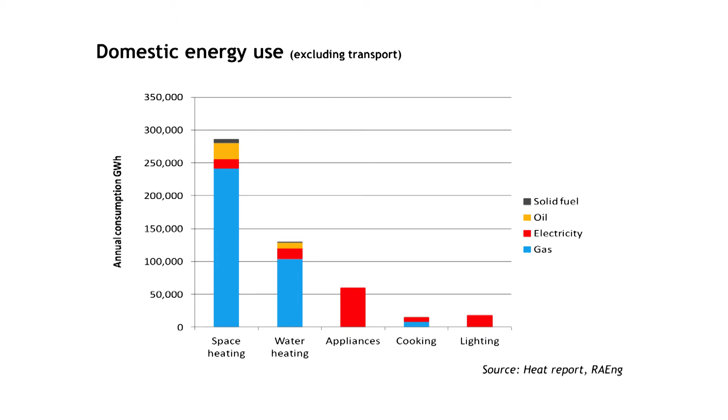When you start looking at home energy use or domestic energy use, you can see from this graph that the big issue is again gas heating. This blue bit here, bright blue on my screen, rather dirty blue on yours, that's gas being used for space heating, and that's gas being used for water heating. Unless we can find a way of dealing with that, then we're not actually going to manage to reduce emissions.

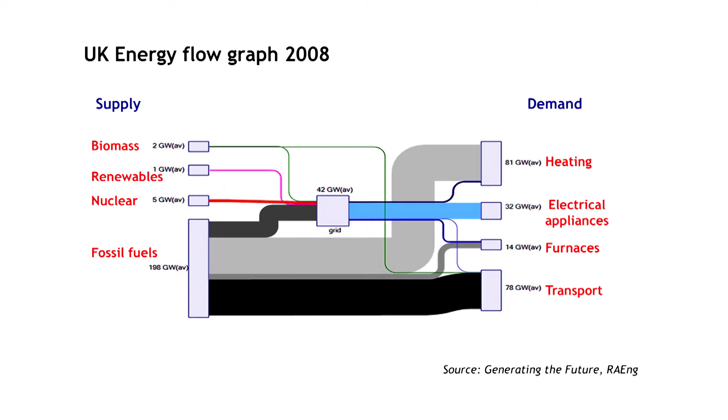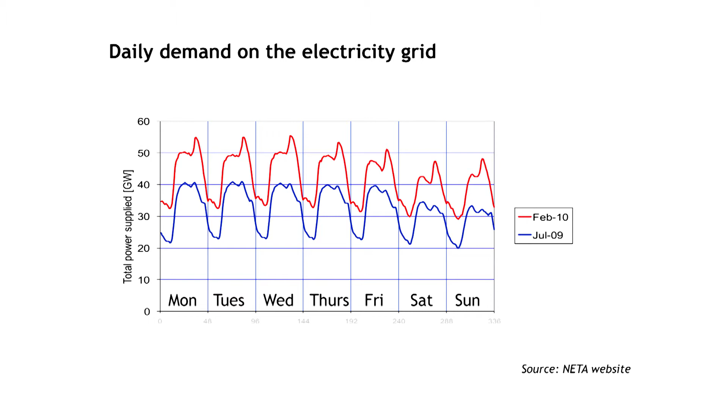The top line is February 2010, when it happened to be quite cold, and the one below it is July 2009, when it was actually quite hot. You can see that the total power supplied on the electricity grid varies between about 20 gigawatts, which is the minimum we have during the summer night, and about 55 gigawatts, the maximum during winter, particularly at about 6 o'clock in the evening. This is quite a challenge for grid supplies, that we're looking at more than a 2-to-1 ratio in demand.

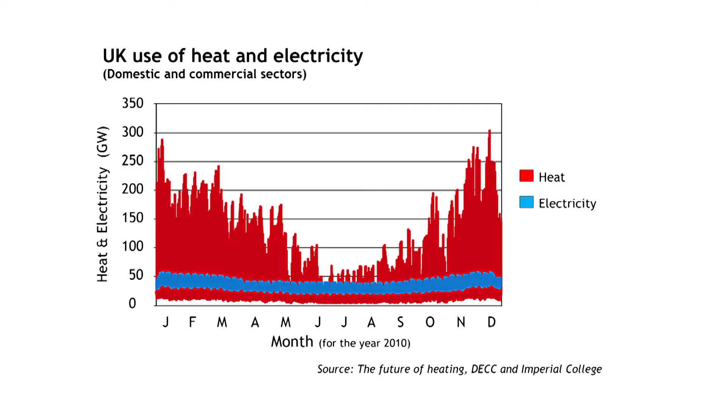But we've now got heat on the same graph, and you can see that goes up to somewhere around 300 gigawatts instantaneous demand in winter. This is where we have a really serious issue, that it's not just a question of saying how do we get so many kilowatt hours or megawatt hours throughout the year, it's how do we deal with these short-term peaks in power and peaks in demand?

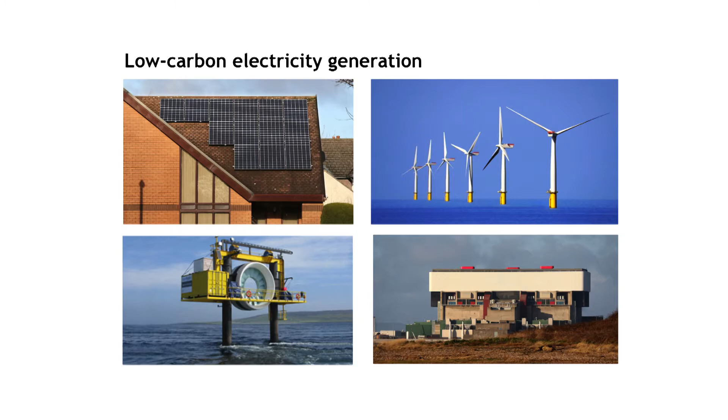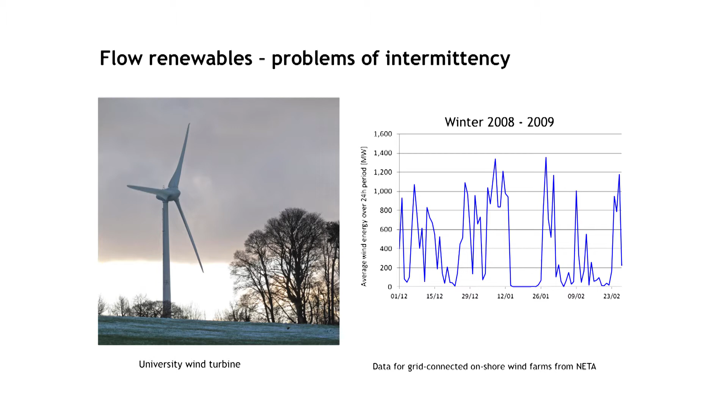But they all have issues. A lot of the flow renewables, this is wind, tides, tidal currents, and sun, are not there all the time. The graph on your right shows the output from wind turbines over winter of 2008 and 2009, and you can see that for a fortnight we didn't have any appreciable wind. We looked at this as part of a study done in the academy, and for a lot of the really serious periods of lack of wind, it's an anticyclone over pretty well the whole of Northern Europe. So saying, okay, we'll just connect into Scandinavia or something doesn't actually help, and that's a fairly serious problem.

One can live perhaps with a few hours of missing electricity energy. To go for two weeks without electricity is actually very difficult. So how does one actually match the various sources that we're talking about with what we actually need and with the demands we have?

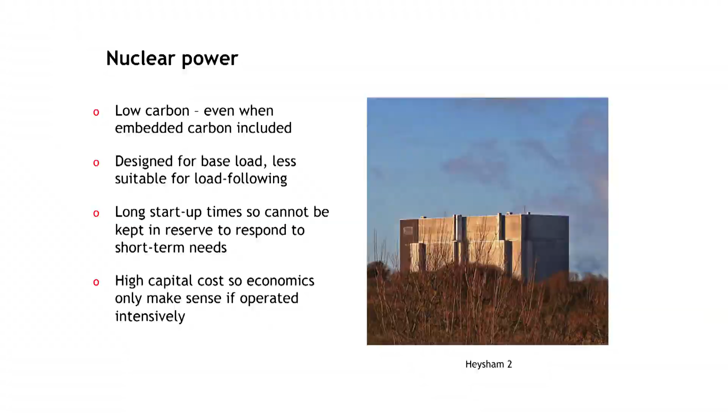Nuclear power is more consistent, but nuclear power is actually very good if you switch it on and want to leave it on. Nuclear power is pretty poor at following the sort of sudden demand increase that we get in Britain at about 7:30 in the morning, when everybody wakes up, puts on their heating, puts on their kettles, sets off their gas boilers, has showers, and all that sort of thing. So it's great as a steady load. It doesn't make much sense as load following, and it certainly doesn't make much sense as peak lopping, where you just want it for a few hours in winter, because nuclear power is expensive, and to build expensive power stations that you're not going to use for most of the year doesn't sound a very good investment.

There's been quite a lot of talk over the last decade about biofuels. I think the general consensus now is yes, they're great, but we don't frankly have enough land to make an appreciable difference. One can perhaps say, yes, we can get to 10% biofuel in our liquid road transport fuel. We could perhaps use biofuel just for aviation if we didn't use it for anything else. But the idea that it would actually replace gas, coal, oil in our mainstream heating, generating and transport uses is really most unlikely.

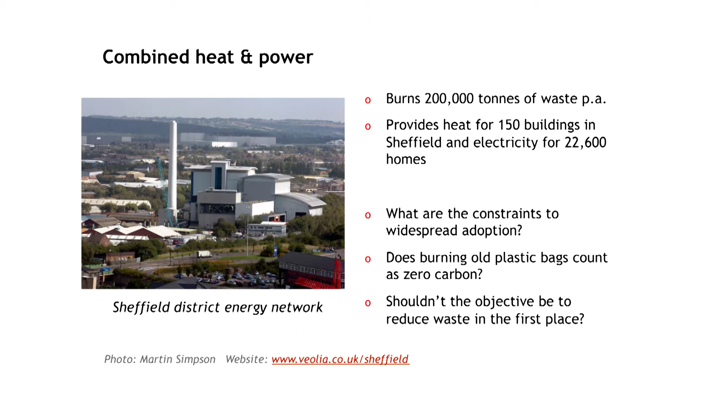There are various other options you can think about. If you go to Sheffield, you'll find this district energy network, a brilliant network with pipes under the city centre. It burns 200,000 tonnes of waste per annum, which means you don't have to have landfill sites. It provides heat for 150 big buildings, some of them quite large university buildings, hospitals, city offices and so on, and provides electricity equivalent to about 22,000 homes.

But what are the constraints? Why don't we all do it? Well, one of the first problems is that you want somewhere that's relatively compact. It works quite well in Sheffield, where there are a lot of buildings fairly near the centre. It would work rather less well in spread out places like, I don't know, Prestbury or Wilmslow, where houses are further apart.

In all the successful cases throughout Europe, district heating has relied on the local authority having the enthusiasm and the incentive to actually make things happen. At the moment, most local authorities, particularly in the compact cities, are saying they're on the verge of bankruptcy. If they have difficulty meeting their legal obligations, how many of them are going to consider that building combined heat and power is actually a priority?

It also works best when you don't have competition. If you're going to say, well, we insist on having competition, then that's rather difficult. Also, I think you have to ask a fairly fundamental question. Does it make sense to burn second-hand plastic bags and say this is zero carbon? After all, plastic comes from oil. Shouldn't you really be campaigning to say we don't want the plastic bags in the first place, we will take our reusable raffia bag to go and buy our potatoes, rather than getting packaging and then burning it? So I think there are some fairly fundamental questions about what counts as zero carbon in this particular environment.

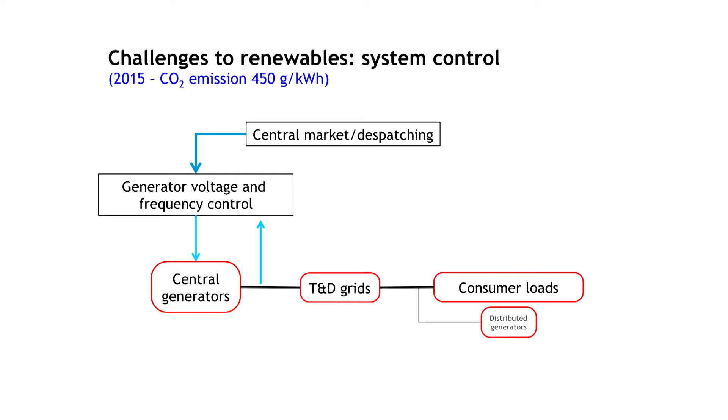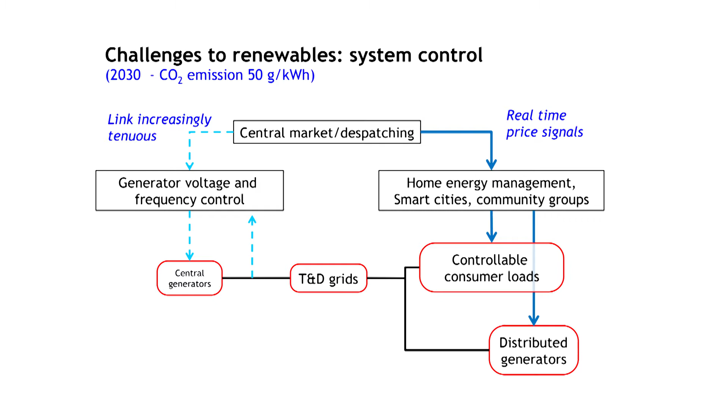There are also some challenges on renewables, and one is how you control the system. Consider this as the overall system as we have at the moment, where you've got some central generators, transmission and distribution grids, and consumer loads. Basically, you have a central marketing and dispatching system. This sends demands to the various generators. You have control systems that monitor the frequency and the voltage and that change the excitation and the amount of steam that goes into the generators. So basically, it's a control system based on the centre.

If we get to a situation where most of our energy comes from distributed generation, then we have a rather different problem. Here we've still got the central marketing and dispatching, and we've still got generator voltage and frequency control, but unfortunately it's an increasingly tenuous set of links. What we're really seeing is the control of frequency and voltage through real-time price signals via home energy management, smart cities, community groups, controllable consumer loads, and distributed generators. This is going to be quite a difficult challenge because we no longer have central control of the grid. And as we've been building solar panels and wind turbines up till now, they're not suitable for a sort of distributed frequency and voltage control. So quite how you work the grid under these circumstances is far from obvious.

There are solutions, but we're certainly not doing it, and no one seriously in Britain at the moment is really thinking about it. This is the frequency you see if you log onto the National Grid website: it starts at 50 hertz, bounces up to about 50.1, bounces down to about 49.9 over a few minutes, then goes back up again. So it's all round about 50 hertz. In Ireland, they've discovered that by having a lot of low inertia wind turbines, this frequency is getting rather more bouncy.

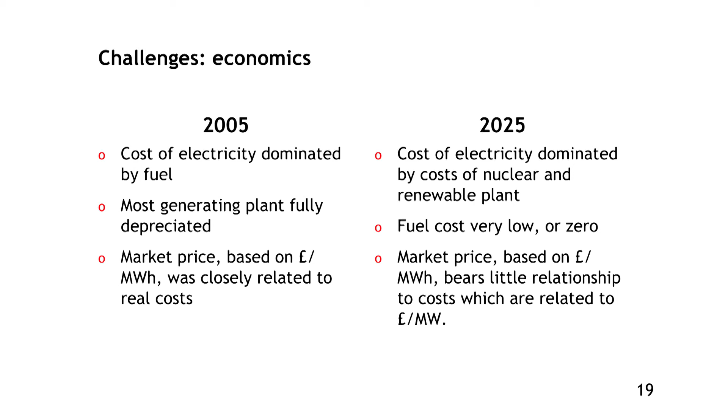The frequency changes more, and this can be quite hazardous to the operation of the grid. So there are quite a lot of technical challenges. It's not just a question of saying let's buy some renewables and bolt it into the grid, one has to redesign the grid to make it work. We've had 100 years of basically central power stations, and now we're talking about redesigning the grid so that it will take distributed energy, and that's actually quite difficult.

There are also some economic challenges. Up till now, we've had a market price based on pounds per megawatt hour or pounds per kilowatt hour, which is closely related to the real cost because the main cost has been fuel. If we have a situation where the cost is dominated by CapEx, capital expenditure, on renewables and nuclear, then to have a market based on operational costs frankly becomes a bit nonsense. And if you're not careful, it becomes more like a game of poker, with people bidding to get a slice of this market, at prices not related to their actual costs.

Now, there have been various attempts at electricity market reform and other things, but the general view, I think, is that these might be sticking plasters, and we have a fundamental problem with our overall energy market system.

A final interesting challenge for renewable energy is oil prices. Renewable energy looks brilliant so long as oil prices are going up and gas is following. Once oil prices drop, and now they're below around $50 a barrel, the financial case for a lot of renewables starts looking a bit dodgy. It's not very obvious how we're going to continue to manage this. So these are some of the challenges. It's not straightforward, and there's a lot to be done.

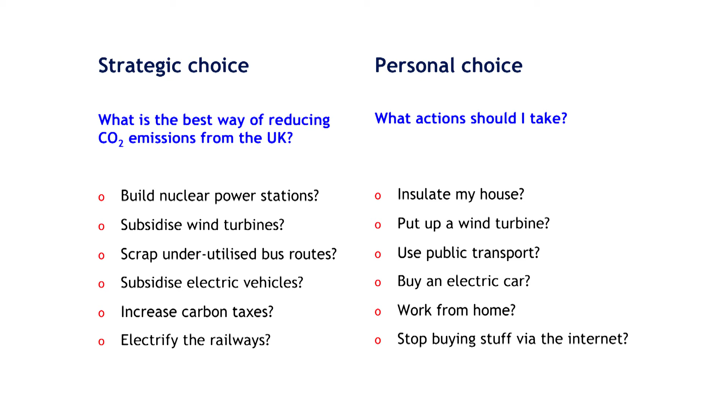Firstly, strategic choice. If you're the government, you might say, how do we reduce CO2? You could say, let's build more nuclear power stations, or subsidise wind turbines, or subsidise electric vehicles, or something of that sort. If you're an individual, you probably don't have those same choices, and you've got: what should I personally do? Sometimes these two don't actually tie up.

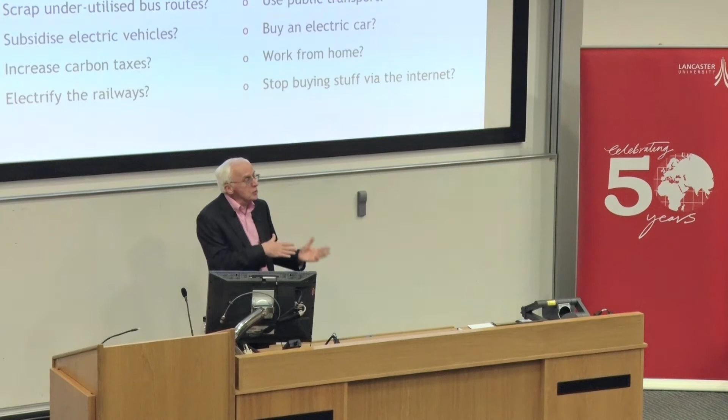Let me give you an example. If you commute from Lancaster to Kendal by train, you get an emission that's roughly 6 kilograms of CO2 per commute. That's the sort of traditional statistics for that sort of thing. If you were to commute by electric vehicle, you'd probably get 3 kilograms of CO2 per commute.

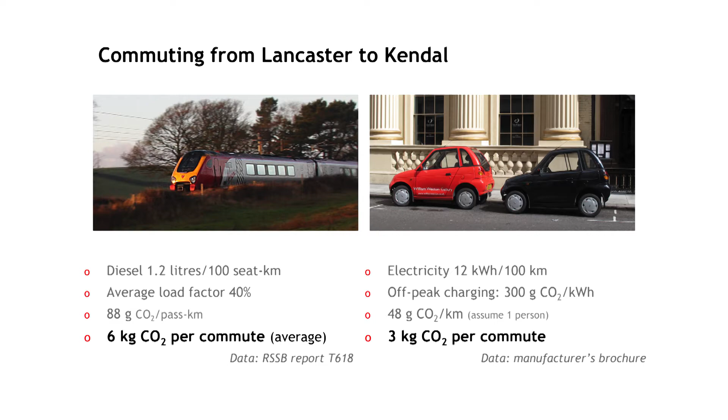So if you're the government, your policy might be to say, right, what we want to do is scrap diesel trains between Lancaster and Kendal, and persuade everyone to go buy electric cars. If you're an individual, then the choice is really rather different, because you can say, well, there's a train going. If I get on it, it will make absolutely negligible difference to how much CO2 it pushes out.

So what I should be doing is going by train, even though the train is actually less efficient than the car. But for me, taking my individual car is always going to be worse than squeezing into an existing train. So these are some of the differences in issues, where what makes sense at national strategy level sometimes is not the right choice at personal decision-making level. And that's sometimes a problem.

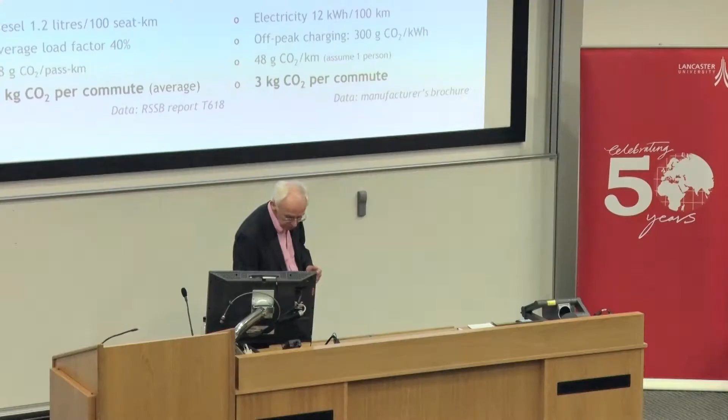So, after that minor digression, looking at transport without carbon dioxide, or with a small amount of carbon dioxide. For several years now, we've been working on electric vehicles. There was a big boost in about 1978 when the oil price went up, and various people said this is where it's going to have to happen in future. Then in about 1980, the oil price went down, and everybody stopped working on electric vehicles, and I found myself redundant in an electric vehicle development group.

Great if you want a second car or about town driving, if you don't go any long distances. Most current EVs are about 100-mile range. At the moment, they're not showing evidence of replacing first cars, family cars.

The economics, frankly, depend on the fact that they're not taxed. But you can't imagine the government saying, oh great, everybody's now using an electric vehicle, so we can ignore tax, and all that road tax we won't bother with, and all the fuel tax we won't bother with. They'll have to find some way of taxing electric vehicles if they really become widespread, and that will rather mess up the economics.

There's also, while there's relatively small numbers, a pretty limited impact on CO2. But you can do better.

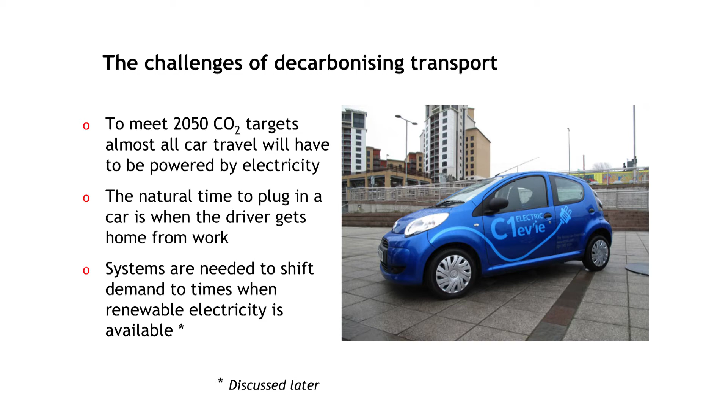Basically, if we're going to meet the 2050 targets, then almost all of our car travel is going to have to be by electric. And the natural time to plug these things in is when you get home from work. But if you remember that previous graph of electricity demand, 6 o'clock in the evening is the worst possible time as far as the grid's concerned. So we need shift systems that will shift the demand from the evening peak through to the middle of the night at some stage. I'll be talking a bit about those in a minute.

Still on the transport theme, railways are generally held up as being good. In 2007, the Department for Transport published a white paper on sustainable railways, and I did some research for them on how much carbon dioxide different railway vehicles actually put out. I wouldn't recommend this as reading, the original report is about 90 pages, and it reads like a train spotter's manual.

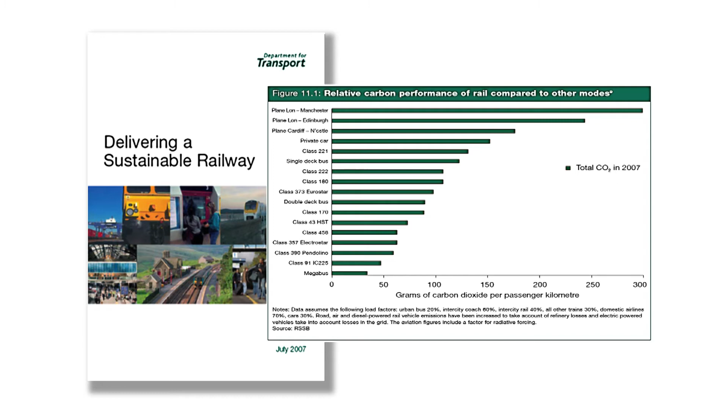There is a graph, this is a sort of extract from it in slightly bigger letters so you can read it. As you can see, plane from London to Manchester is obviously the worst in terms of CO2 emissions per person. Interestingly, single and double deck buses don't come out as well as you think they ought to. Electric trains come out much better than diesel trains, and even so, it's not perfect by any means.

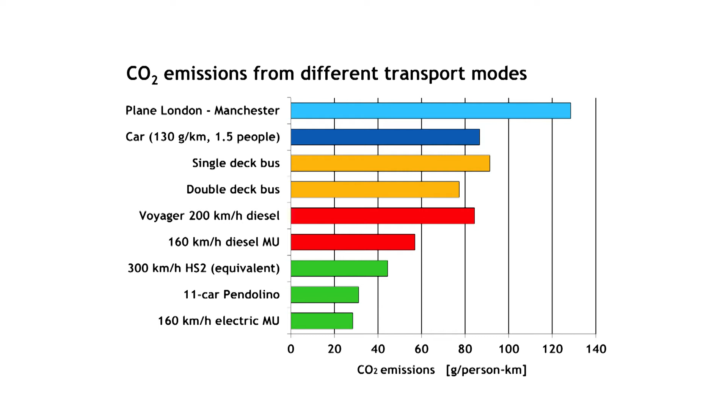So railway electrification is good. If you look at those bars there, the green ones, which are the electric trains, are roughly half the emission of the red ones. So diesel train, Glasgow to Manchester, about 35 grams per seat kilometre. Electric train, recently introduced, class 350s, 16 grams at the present mix of electricity generation, down to about 8 grams probably by about 2030, if we get our act together on decarbonising the electricity system.

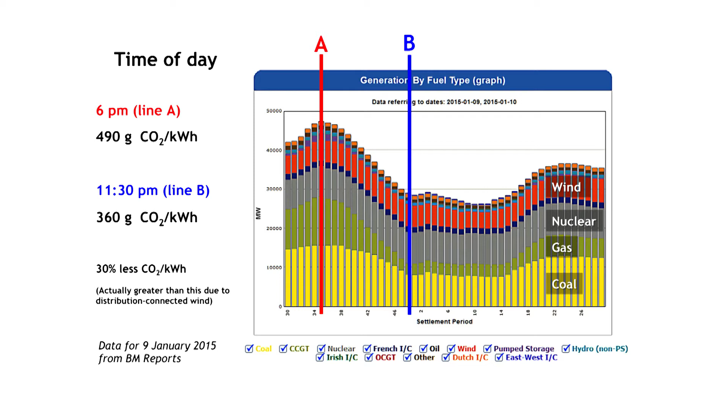But what really matters is actually the time of day when you take your electricity. Here I've plotted, taken from the web, the data for the 9th of January, last month, of the generation by fuel type: coal, gas, nuclear, and wind are the 4 main big ones. As you can see, coal along the bottom is one of the dominant. I was looking up recently what the current state is over the last 24 hours, and coal is still about 30% of our present electricity demand.

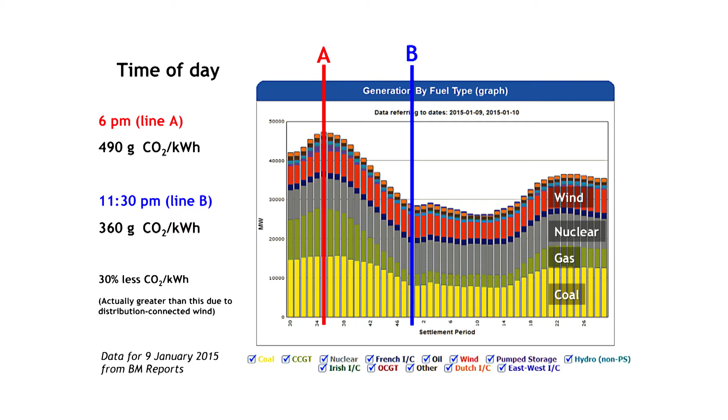If you take those two lines and look, one at about 6 in the evening, this is the evening of the 9th of January, and one at 11:30 in the evening, you can see that at 6 p.m. the carbon intensity of electricity is 490 grams per kilowatt hour, and the same figure at 11:30 p.m. is only 360 grams per kilowatt hour.

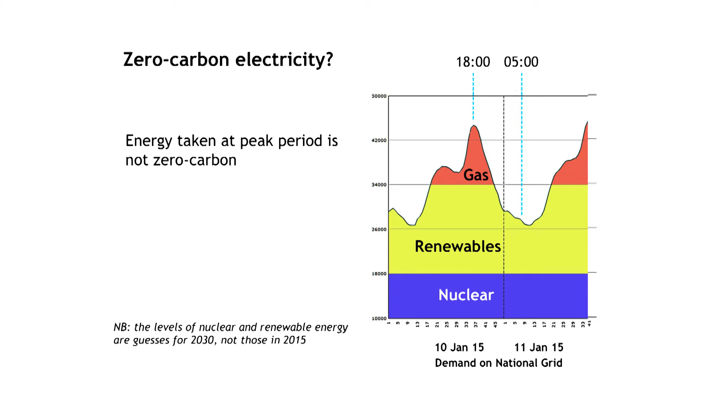Now, as we decarbonise the electricity grid, this will become more emphasised. This is the figure for 10th and 11th of January, and let's assume that we're actually managing to decarbonise. So we've done nuclear along the bottom, renewables next, gas just for the top bit. If you're adding demand in at 1800 hours, you're basically going to be switching on more gas turbine power stations.

So the question really is, if you decide as a matter of policy we're going to switch transport from cars onto electric railways, and the whole of the commuting peak will actually require additional gas turbine power stations, are we actually then saving the sort of CO2 that we thought we ought to be saving? So go back to these figures.

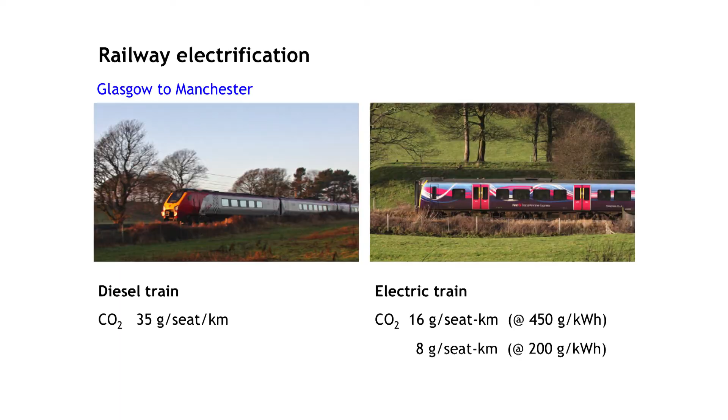Yes, if we work on average values, but we're not actually working on average values, particularly for commuting. For commuting, we're talking about taking most of our electricity at that point, which would mean having more gas turbine power stations, so the marginal CO2 for the transfer of transport is actually going to be quite heavily carbon intensive, probably about 450 grams of CO2 per kilowatt hour.

So this, I think, is a challenge. How do we deal with a situation where we've got not just an average CO2 of the electricity system, but we're having to add particularly certain types of generation in order to cope with the additional loads we're putting on as a way of decarbonising transport and heating?

I was surprised when I did the calculations about buses. When they're full, buses are always lower CO2 than travelling by car. But if you look at the data on buses, and I went to talk to Stagecoach, they reckon they're about 6 miles a gallon around town, it obviously depends a bit on where the bus is going. I was surprised to read that the average loading is actually only 9 passengers. Now, Stagecoach in Lancaster couldn't tell me that, but I did go and talk to the passenger transport authorities in Manchester and Liverpool, and at the time they said, okay, it's a few years ago now, that 9 was about the sort of typical number of passengers.

Every bus we go on, it feels much more full than that. But then that's because we go on the full ones, because we go at peak times. If you look out of your bedroom window at 6:30 in the morning and watch the buses going to the university, there are not very many students on them. And I think this is part of the problem, that if you want buses to be attractive, you have to do a regular service throughout the day. If you want to reduce carbon, you say, well, no, not going to run any buses except at peak. And this is, I think, a difficulty of any of these passenger transport operations.

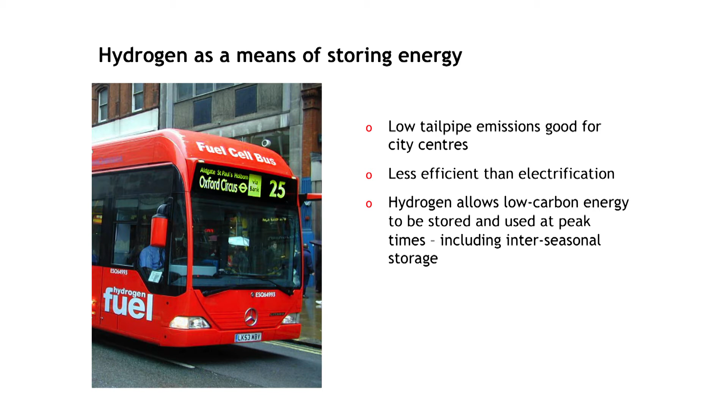A really good way of running transport is to use hydrogen as a means of storage. Low tailpipe emissions in city centres, which is great. A bit less efficient than electrification, but if you're making the hydrogen by using surplus wind energy in summer, storing it and then using it in the winter or at peak periods, doesn't matter what the efficiency is. If you're building plenty of renewable energy supplies in order to provide heating and other uses, then you will probably have surplus electricity and surplus zero carbon electricity in summer, and it would therefore be good to try and find a way of using that. Hydrogen offers one way of doing that, a very worthwhile study.

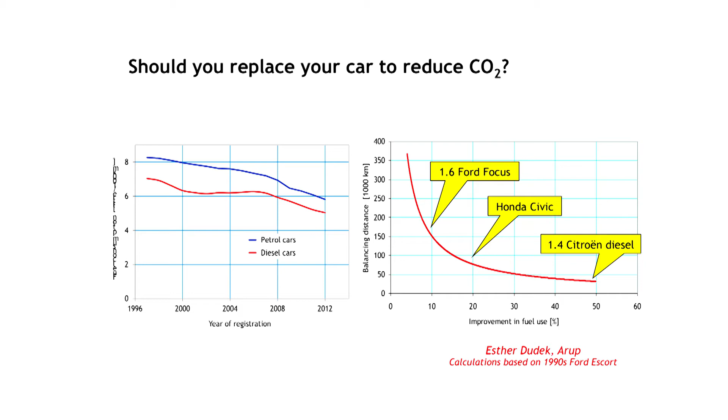She started off with a 1990s Ford Escort, as students are wont, and said, well, if I buy a 1.6 Ford Focus, it goes there. If I buy a Honda Civic, I could get to there. And if I buy the cheapest possible, lowest emissions, lowest fuel consumption Citroën diesel, then I sort of break even after 30,000 kilometres. I think this is quite an interesting debate as to how much saving you need to make before you can say, I will scrap this existing asset and get a new one.

And the same argument actually holds true for housing. Because if you're going to say, let's demolish inefficient housing, you can do exactly the same sort of calculations there. Should I be demolishing inefficient housing and building more efficient housing?

Should we avoid mail order? If you've got a situation where you can either drive into town and go to a shop that seems to think that its mission in life is to warm Penny Street by having its doors wide open in January, or alternatively you can get it delivered by the post office from some central place, then probably you're better off getting it delivered by the post office.

If, on the other hand, you do a lot of searching for something using Google, and their servers use about 250 megawatts — that's about a quarter of one of the Heysham power stations — and you then go into somebody else's server, so there's plenty more megawatts being used there, then you start asking, well, where's all this energy coming from? And if it's then delivered by a whole fleet of different types of vans from different types of companies, this doesn't make much sense environmentally.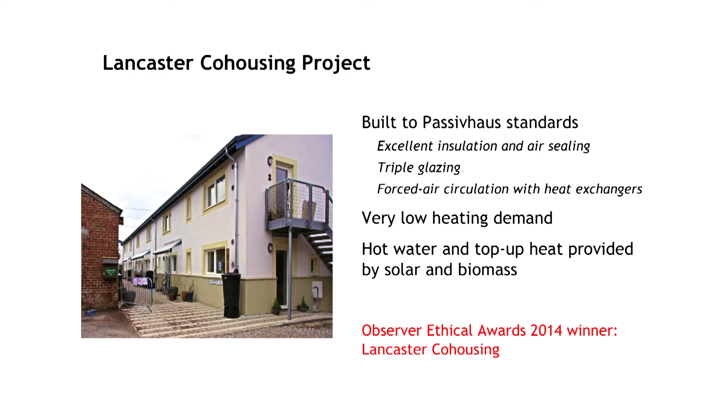The third big area I wanted to talk about was how we heat homes without burning gas. Now, some houses are designed new and work well. This is Lancaster Co-housing out next to the Lune. It's built to what is called passive house standards, with excellent insulation and air sealing, triple glazing, and most importantly, forced air circulation. So rather than just opening the window and letting all the air you've warmed with your computers and fish fryers go out through the window, you circulate it through a heat exchanger, warming the incoming air as you cool the outgoing air. It works — they basically only need heat very, very rarely, and for domestic hot water.

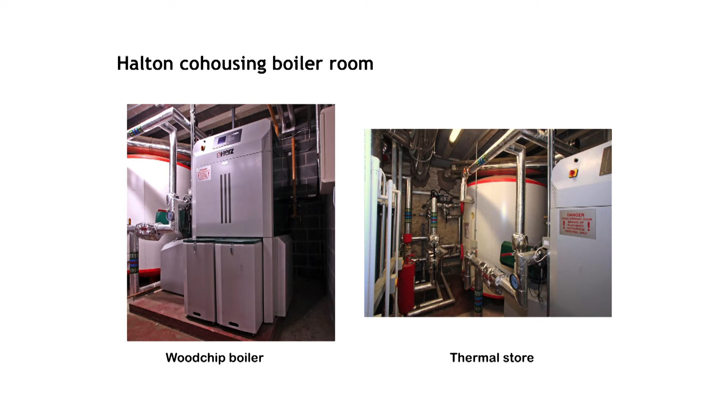And it won an award. This is their boiler house. They have a wood chip boiler there, providing heating for hot water. It can run all day if it wants to, and there's a big storage tank that stores the hot water. So it works. If we demolished everything else and built all houses like this, we could drastically cut the energy we use for heating.

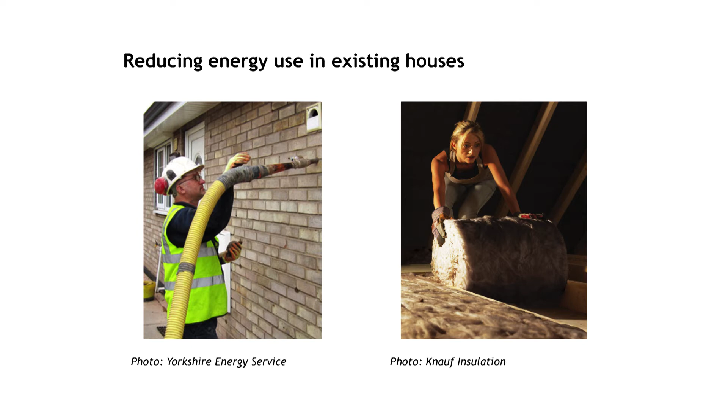With existing houses, yes, you can heat things, and if you talk to the various government departments, they talk about grants for cavity wall insulation, or loans nowadays, for putting roof insulation in. And the pictures you see are always like this - these are a couple of commercial pictures showing how easy it is.

If you go into any sort of normal house, one that's got little turrets and garrets and big windows and stone walls that don't have cavities and so on, it's actually quite difficult to heat a lot of houses. And even quite a few modern houses from the 1980s were designed not primarily to be easy to heat, because they were designed from the days when oil was sort of $10 a barrel, and it seemed a good idea just to burn it.

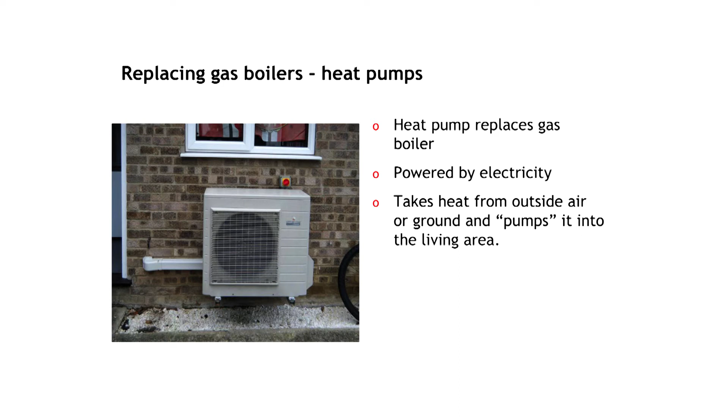One can do things. One can use heat pumps to replace gas boilers, basically like the same mechanism as a fridge. It pumps heat from outside to inside in the same way as the fridge pumps heat from inside the fridge to the coils at the back.

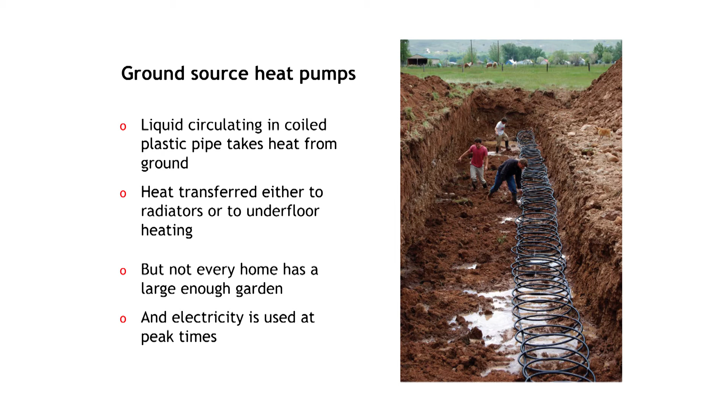If you don't like one of those outside your window, you can have a ground source heat pump that's probably more efficient, and you merely dig a small trench in your garden and put in a plastic pipe, and it takes the heat from the ground and puts that into your house.

But the limits: if you happen to live in a nice, spacious house, this makes a lot of sense. If you've got a spare £25,000, this makes a lot of sense. If you live in a flat, a ground source heat pump doesn't work too brilliantly. Well, it might if you actually went into your neighbour's house down there, but they might complain.

If you've got a house that's well insulated, you can run your heat pump all day and every day. If you haven't got a well insulated house, then you're still using your electricity at peak times, and that is exactly what we don't want to be doing.

Solar water heating, again, if you can do it, great, but it does require a storage tank, and the majority of houses nowadays are being built with combi boilers without storage tanks.

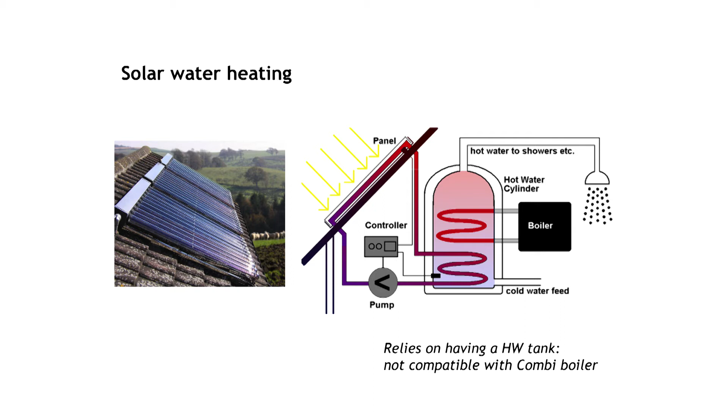If you've got neighbours who bought a house which had trees planted in its garden about 30 years ago and which are now getting far too big, and they regularly cut them down, then having a fire that burns their waste timber is actually very good.

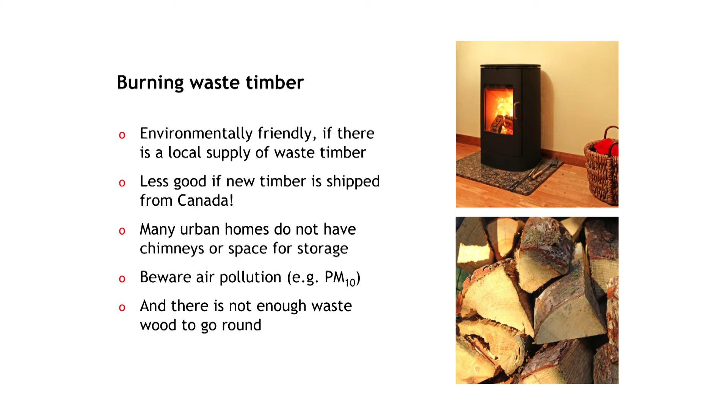Environmentally, it's a bit less good if you import it as wood chip from Canada, which I think is what they're doing in the Drax power station conversion.

Also worth remembering that a lot of urban houses don't have storage space. You need about a cubic metre at least for storing the wood, and quite a lot don't have chimneys, and there are various issues. Talk to Barbara Maher in LEC, and she'll talk about PM10s, particulate matter coming off burning these types of fuel. And there isn't basically enough waste wood to go round.

So I suppose this is really the summary of the challenges. We can't insulate all homes to passive house standards. Knocking everything down and rebuilding becomes expensive and also would use a lot of energy in its own right.

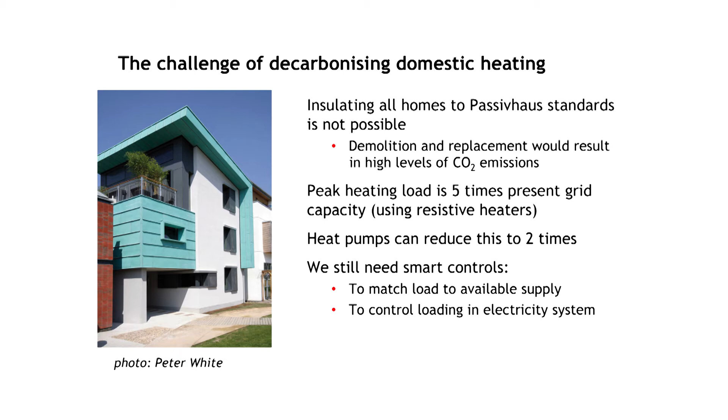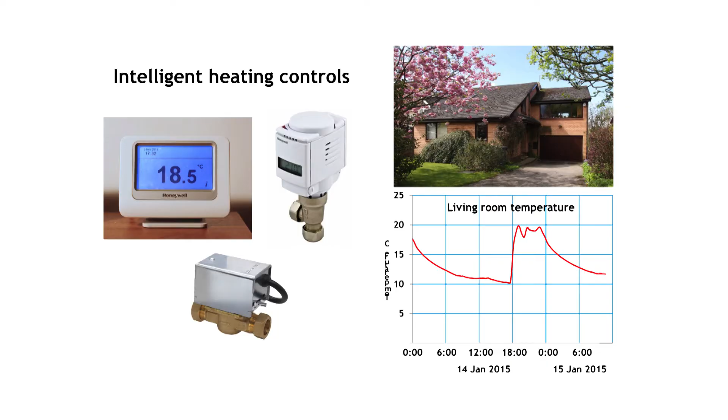So perhaps we can do something with smart controls. This is moderately smart controls, and it's what we did to our house. This up here is a living room that's only used in the evening, so we put in various sort of tablet computers that are linked to radio-controlled solenoid valves and all that sort of stuff. And now our living room comes on just from 6 o'clock in the evening till 11 o'clock, goes off the rest of the day. Bedrooms come on when we want them.

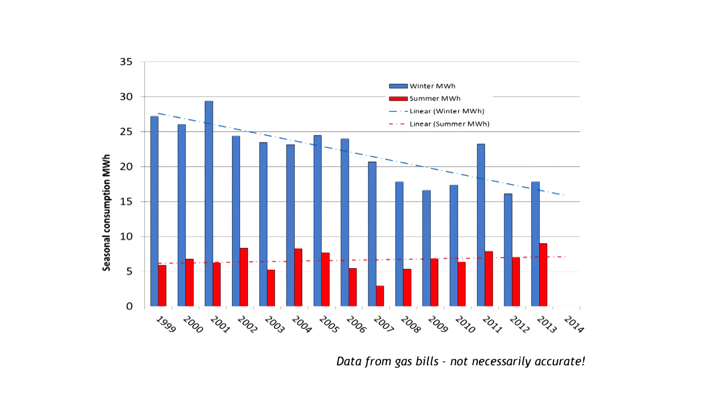So basically, rather than switching on the house and saying we heat the house, we say we heat the areas we're living in. And it has reduced electricity and gas use, particularly gas use. You can see seasonal consumption's gone down by about 30%, despite the fact we're actually using the house more. So probably comparing like with like, by insulation and so on, we've reduced it by 40%. This is by 40%, it's not by 80%. And so to get 40% possible, to get 80% reduction by these means is actually pretty challenging.

And that perhaps is where we get smart grids. And this is where we try and integrate everything.

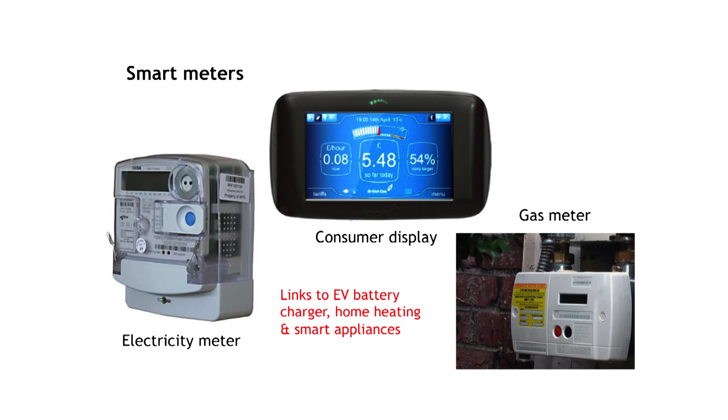This is the ultimate, if you've seen the recent films, where the theory of everything comes together in the smart grid. The idea is very simple: you have electricity meters and gas meters that connect into a consumer display. The original idea was that people would look at the display and say, oh dear, we're using a lot of electricity, perhaps we ought to turn the taps down a bit. I suspect sociologically people probably wouldn't do that very much. It becomes more interesting when you link this central control into your EV battery charging, home heating, smart domestic appliances, and so on.

So these are some of the things we want our smart grid system to do. We want to control our heating to provide adequate comfort where we want it. We want to manage EV charging, so we know our electric vehicle is charged when we want it. We want to minimise our bills. We want to enable CO2 targets to be met. These are the wish lists.

Translating this into engineering is really quite fun. There are also various other things as well. We don't want people to be able to hack it, bearing in mind that if you hack your electricity meter, you could save yourself £1,000 a year. So there's plenty of incentive to hack it. And it's likely to be coupled in with all sorts of other networks, so there are plenty of ways in to do your hacking. And it's got to be easy to understand.

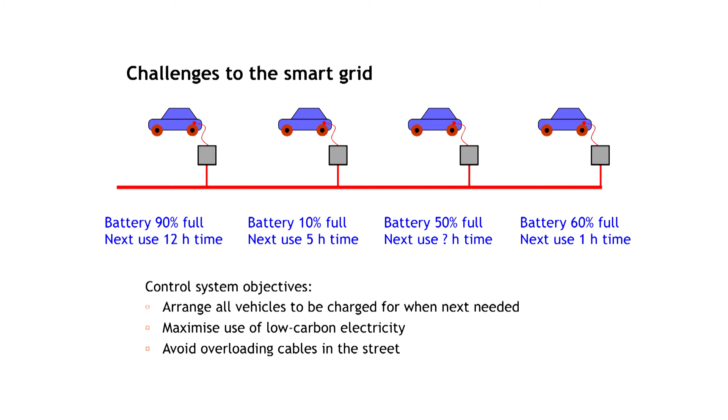Here's one of the challenges. Imagine a simplified street with four houses, each with an electric vehicle, and when they come home, that's how the battery states are at any particular time. There's 4 buttons on the battery charger, so when you plug it in you can say, I want it in an hour, 6 hours, 12 hours, or whatever. And the control system—treating it as a sort of discussion with a person—we want you to arrange for all the vehicles to be charged when next needed.

We want to maximise the use of low carbon electricity, and we want to avoid overloading the cables in the street. So really quite straightforward, and yes, one could do it. It becomes a bit more complicated when you realise that the electricity network operator that owns the cables in the street is a different entity to the electricity retailers that each of these individual houses does business with. So the way the network has been privatised doesn't actually work very well in this particular state.

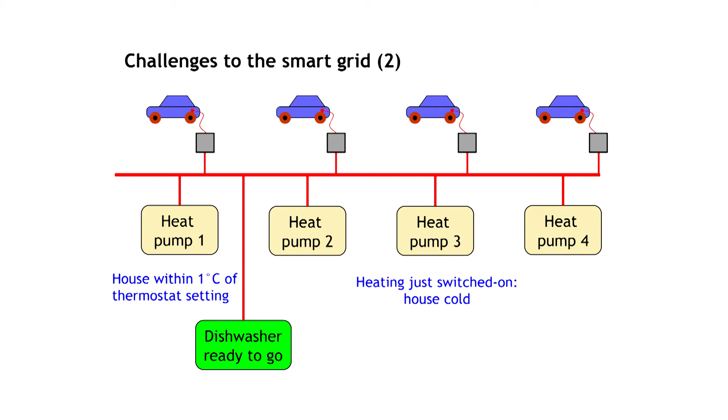And then you've probably got a few things like this, where somebody loads up their dishwasher and says, great, it's full, now please control system, will you switch it on at the appropriate time so it costs me the least amount of money? Oh, and by the way, I'd like my things washed by 9 o'clock tomorrow morning. So this is 4 houses.

If you can now multiply that up to 40 million houses, that's the kind of challenge one's looking at for a really intelligent smart grid. And you merge this in with low carbon electricity, electric vehicles, and intelligent home heating. Take this lot together, and then you've probably got a network and system that will start to get somewhere near this 80% reduction in CO2, and that doesn't actually cost an arm and a leg.

There are a few other things you can do if you want to. How do you like vehicle-to-grid energy charging? If you've got a normal situation, you charge all your vehicles, but just imagine a situation where energy is a bit short, electricity is a bit short. You've got one car, the battery is fully charged, and next door the battery is largely empty.

Why not ask your computer to say, lend Kevin next door some of my electricity, and by the way, charge him for it? I mean, that might work. Technically, it's possible. Organisationally, it comes into the quite challenging category. And in terms of making sure it's done in a way that's safe and doesn't cause problems with electrical protection and other things, again, is not a totally trivial problem.

So, a few conclusions. I promised to talk for no more than about 45 minutes, and I think I'm at 43 at the moment, so we'll see where we go.

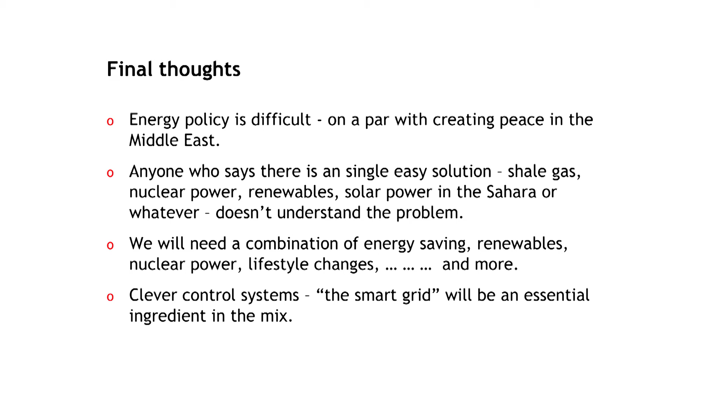Anybody who says there's a single easy solution, whether it's shale gas or nuclear power or renewables or solar power in the Sahara, I suggest they don't really understand the problem. I don't think this is a situation where there's a single answer. What we're looking at is a complicated system that will involve a bit of this, a bit of that, a bit of the other, all put together. So we need this combination: energy saving, renewables, nuclear power, lifestyle changes, and more. One will not suffice, we need the whole lot. And we need a very clever control system.

And that, I think, is where organisations like Lancaster University should be able to contribute in a big way - how do we actually put together this type of intelligent system, rather than just a simple situation of having a power station that we switch on when people want to make a cup of tea in the interval of the cup final?